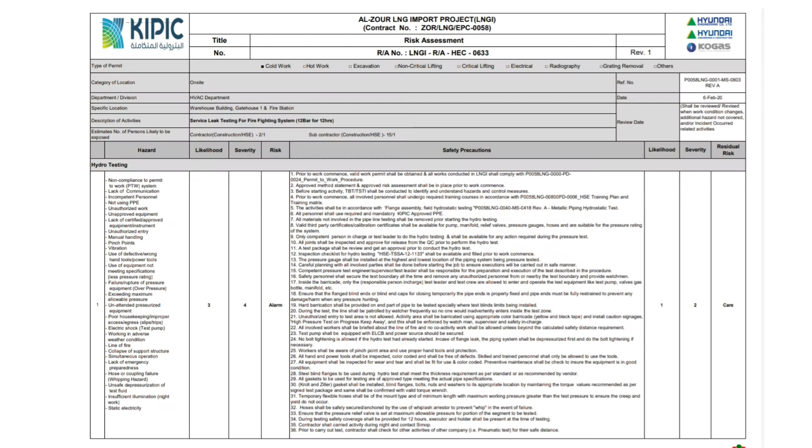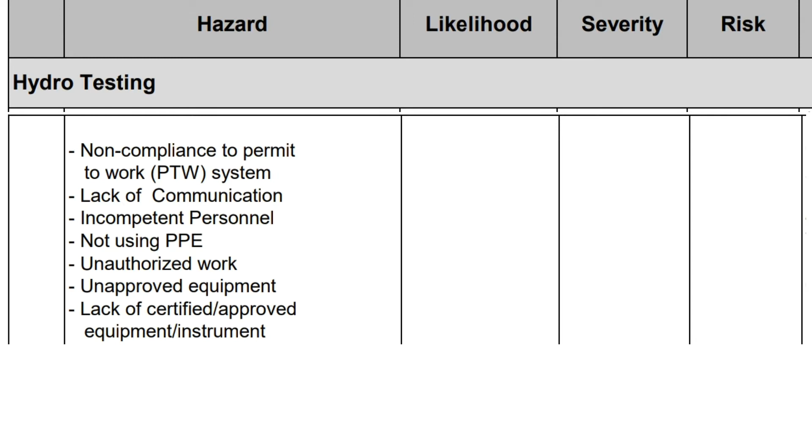Hazard: non-compliance to permit to work (PTW) system, lack of communication, incompetent personnel, not using PPE, unauthorized work, unapproved equipment, lack of certified or approved equipment and instruments, unauthorized entry.

Manual handling, pinch points, vibration, use of defective or wrong hand tools and power tools, use of equipment not meeting specifications, less pressure rating, failure, rupture of pressure equipment, overpressure, exceeding maximum allowable pressure.

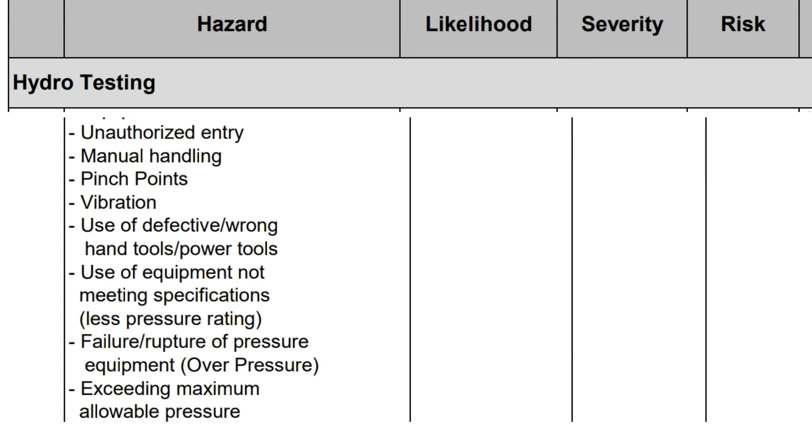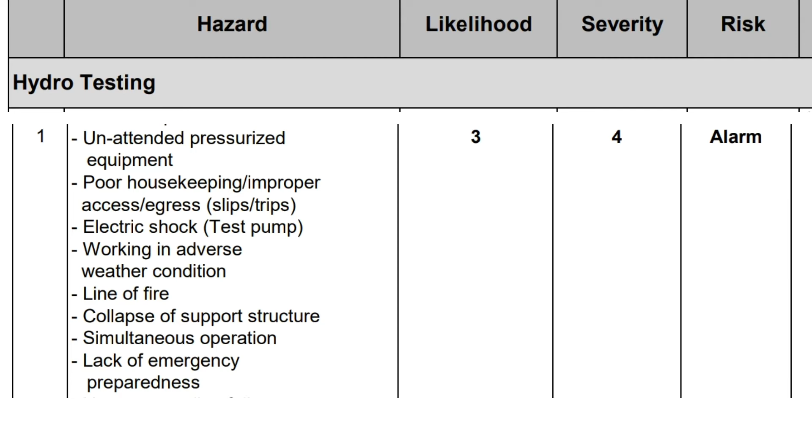Unattended pressurized equipment, poor housekeeping, improper access and egress, slips, trips, electric shock from test pump, working in adverse weather conditions, line of fire, collapse of support structure, simultaneous operation, lack of emergency preparedness, hose or coupling failure, whipping hazard.

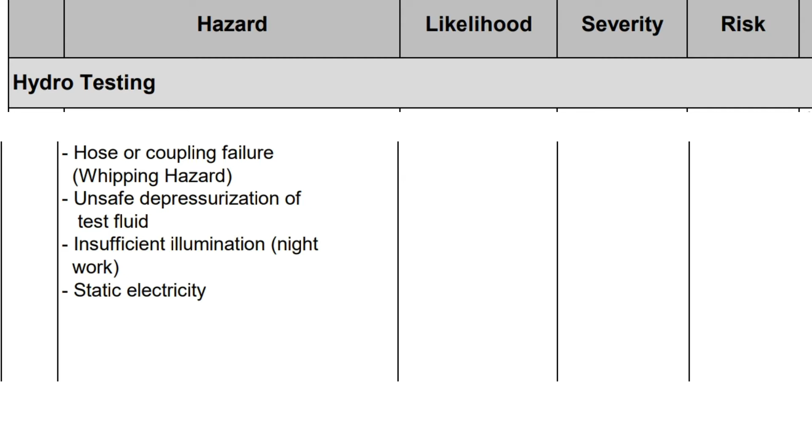1. Prior to work commence, a valid work permit shall be obtained and all works conducted in LNGI shall comply with the permit to work procedure.

2. Approved method statement and approved risk assessment shall be in place prior to work commence.

3. Before starting activity, TBT/TSTI shall be conducted to identify and understand hazards and control measures.

4. Prior to work commence, all involved personnel shall undergo required training courses in accordance with the HSE training plan and training matrix.

5. The activities shall be in accordance with flange assembly, field hydrostatic testing, and metallic piping hydrostatic test.

6. All personnel shall use required and mandatory KIPIC approved PPE.

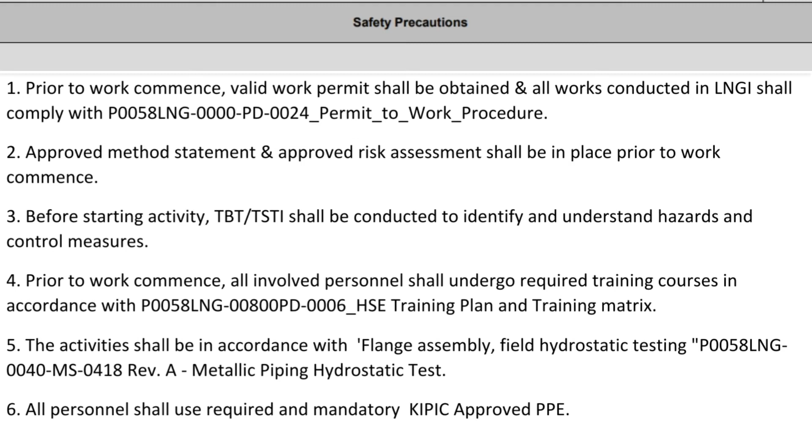7. All materials not involved in the pipeline testing shall be removed prior to starting the hydro testing.

8. Valid third-party and calibration certificates shall be available for pump, manifold, relief valves, pressure gauges, and hoses, and are suitable for the pressure rating of the system.

9. Only a competent person in charge or test leader shall do the hydro testing and shall be available for any action required during the pressure test.

10. All joints shall be inspected and approved for release from QC prior to performing the hydro test.

11. A test package shall be reviewed and get approval prior to conducting the hydro test.

12. An inspection checklist for hydro testing shall be available and filled prior to work commence.

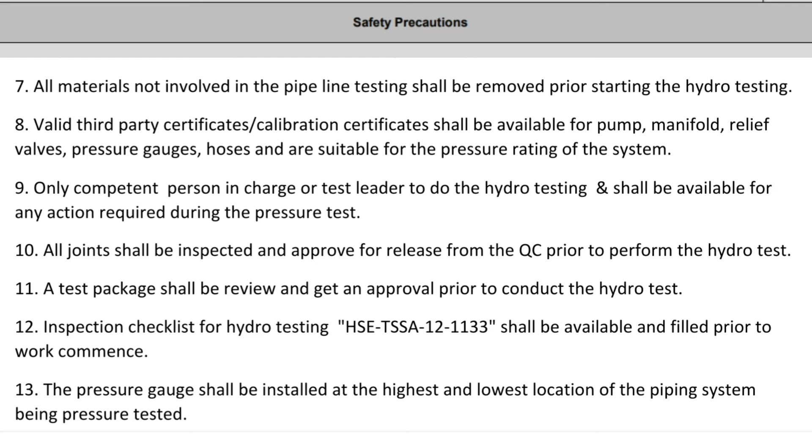13. The pressure gauge shall be installed at the highest and lowest location of the piping system being pressure tested.

14. Careful planning with all involved parties shall be done before starting the job to ensure execution is carried out in a safe manner.

15. A competent pressure test engineer, supervisor, or test leader shall be responsible for the preparation and execution of the test described in the procedure.

16. Safety personnel shall secure the test boundary at all times and remove any unauthorized personnel from or near the test boundary, and provide a watchman. 17. Inside the barricade, only...

...the responsible person in charge, test leader, and test crew are allowed to enter and operate the test equipment like test pump, valves, gas bottle, manifold, etc.

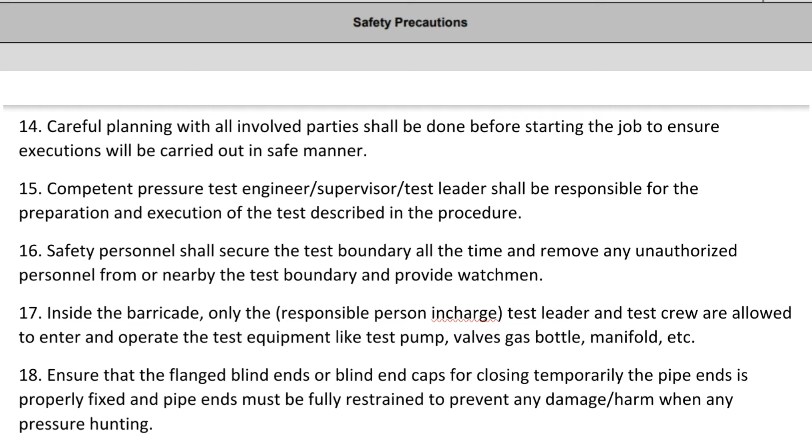18. Ensure that flanged blind ends or blind end caps for temporarily closing the pipe ends are properly fixed, and pipe ends must be fully restrained to prevent any damage or harm when pressure hunting.

19. Hard barrication shall be provided on the end part of the pipe to be tested, especially where test blind limits are installed. 20. During the test, the line shall be patrolled by a watcher frequently so no one would inadvertently enter inside the test zone.

21. Unauthorized entry to the test area is not allowed. The activity area shall be barricaded using appropriate colored barricade, yellow and black tape, and caution signage such as 'high pressure test in progress, keep away' shall be installed, and this shall be enforced by the watchman, supervisor, and safety in charge.

22. All involved workers shall be briefed about the line of fire, and no co-activity work shall be allowed unless beyond the calculated safety distance requirement.

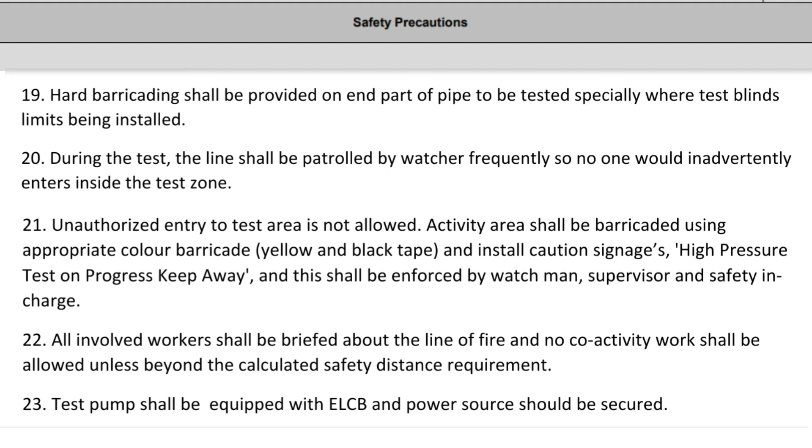23. Test pump shall be equipped with an ELCB and the power source should be secured.

24. No bolt tightening is allowed if the hydro test has already started. In case of a flange leak, the piping system shall be depressurized first and then bolt tightening done if necessary.

25. Workers shall be aware of pinch point areas and use proper hand tools and protection. 26. All hand and power tools shall be inspected, color-coded, and free of defects. Skilled and trained personnel shall only be allowed to use the tools.

27. All equipment shall be inspected for wear and tear, fit for use, and color-coded. Preventive maintenance shall be checked to ensure equipment is in good condition.

28. Steel blind flanges used during hydro test shall meet the thickness requirement as per standard or as recommended by vendor. 29. All gaskets used for testing shall be of approved type meeting the actual pipe specifications.

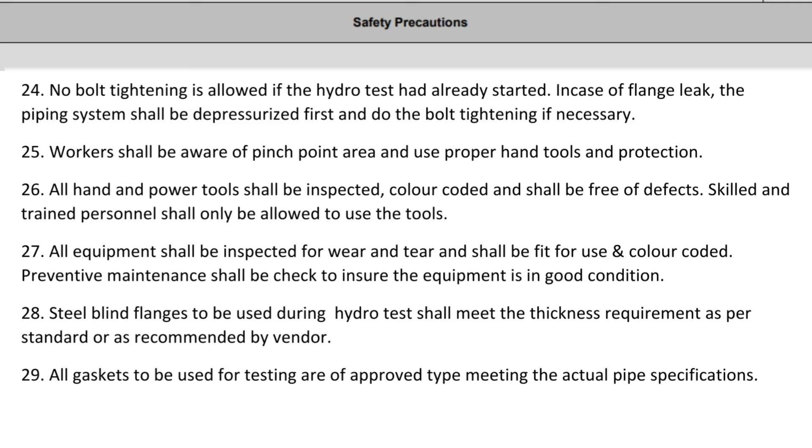30. The correct size gasket shall be installed, with blind flanges, bolts, nuts and washers placed in their appropriate location, maintaining the torque values recommended per the signed test package, confirmed with a valid torque wrench.

31. Temporary flexible hoses shall be of the approved type and minimum length, with maximum working pressure greater than the test pressure to ensure creep and yield do not occur.

32. Hoses shall be safely secured and anchored using whiplash arrestors to prevent whip in the event of failure. 33. Ensure the pressure relief valve is set at the maximum allowable pressure for the portion of the segment being tested. 34. During testing, safety coverage shall be provided for 12 hours, and the executor and holder shall be present at the time of testing.

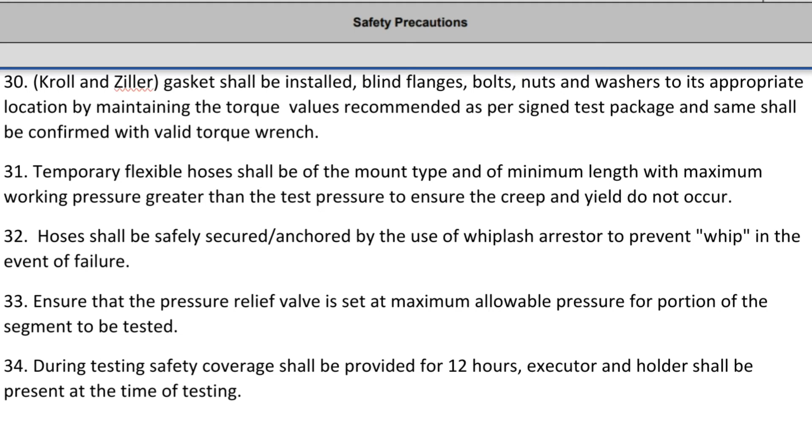37. Ensure proper communication between the worker in the manifold area and at the end point.

38. The pressure shall be raised gradually until reaching the test pressure and held as per the approved procedure and work method statement.

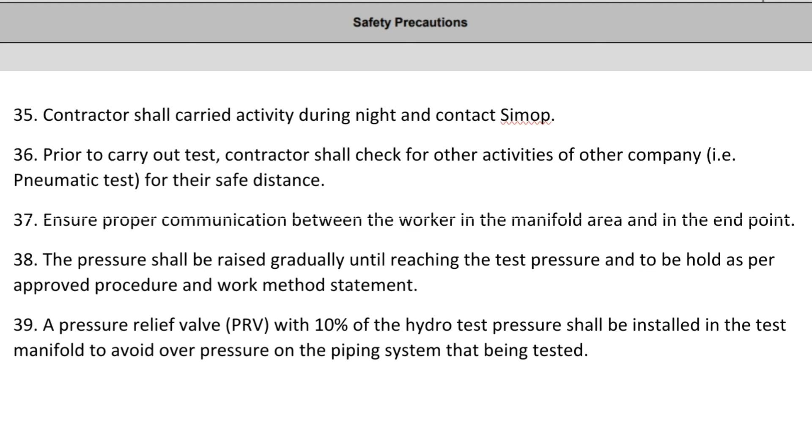39. A pressure relief valve (PRV) set at 10% of the hydro test pressure shall be installed in the test manifold to avoid overpressure on the piping system being tested.

40. The test manifold shall be located in an open and secured area, far from the line system. If necessary, minimize crew presence near the test manifold.

41. The sectional pipeline to be tested shall be partially backfilled, supported using sandbags, and joints shall remain exposed prior to pressure testing.

42. All pipe equipment supports shall be inspected as per project specifications. Care shall be taken to avoid overloading of the support system or supporting structures.

43. Proper housekeeping shall be maintained at all times, and all unnecessary materials shall be removed.

44. Provide proper storage for used or to-be-used hydro test materials with barricades and signage. 45. All Chicago couplings, fittings, safety pins, and rated hoses of the test pump shall be pre-inspected before use.

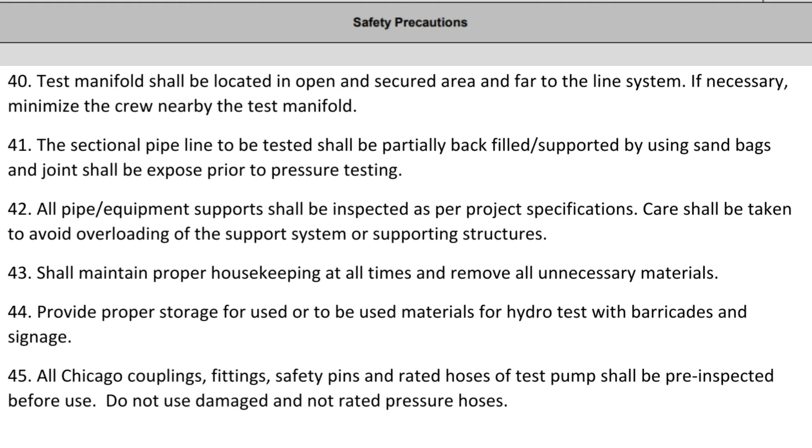Do not use damaged or unrated pressure hoses. 46. The test pump shall be grounded to avoid static electricity.

47. Ensure test pump hose connections have whiplash arresters on them to mitigate whip during hose failure. 48. Always position the test pump in a firm and stable place and at a safe distance from the working parts of a tool.

in case of abrupt changes in movement occur. 49. Ensure that cables and hoses are hung, routed, or laid so they will not cause obstruction or tripping.

50. Work-rest regime shall be complied with as per the heat stress index, abiding by the heat stress procedure. 51. All employees shall comply with the emergency management plan and notify the hotline in case of emergency.

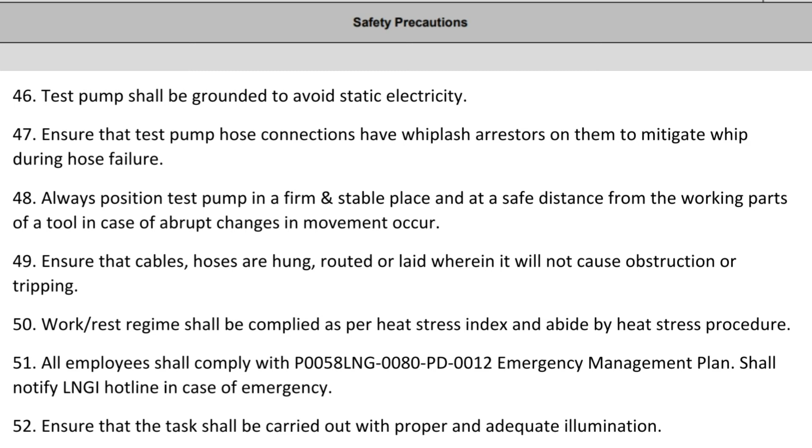52. Ensure the task is carried out with proper and adequate illumination. 53. Access to the building shall be restricted during testing, with no unauthorized entry.

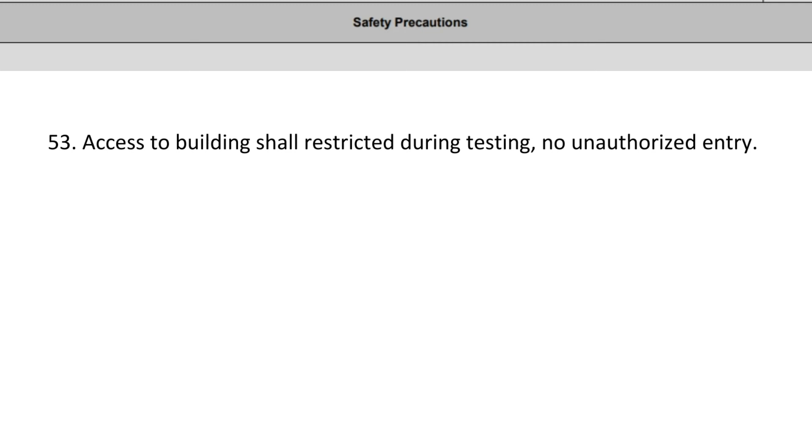Work at height. Scaffolding hazards include: fall of personnel, fall of material, dropped objects, collapse of scaffold, hole opening, slip, trip, fall, improper access and egress, and unauthorized modification of scaffold.

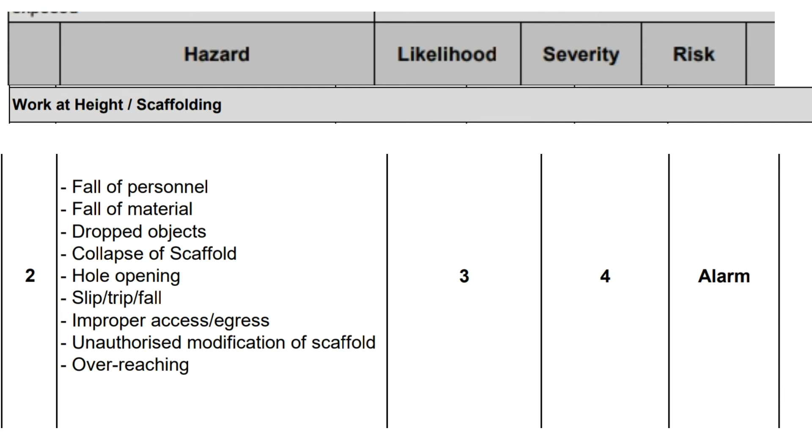Over-reaching. Safety precautions: 1. All personnel working on scaffold shall wear a full body harness with shock-absorbing double lanyard and maintain 100% tie-off at all times, strictly followed. The full body harness shall be inspected and color-coded.

Any defect found or acquired by these items shall result in removal from site and placement in the quarantine area.

2. Scaffold erection and dismantling works shall only be conducted by scaffolders under a competent supervisor, both with KIPIC-approved third-party certifications. 3. Ladders must be in good condition and must not be painted.

Ladders shall extend approximately 1 meter above the working platform and shall be secured so they cannot slip. 4. The user shall inspect the ladder before each use. A qualified person shall inspect ladders and attach an inspection sticker.

Color coding. 5. While ascending or descending a ladder...

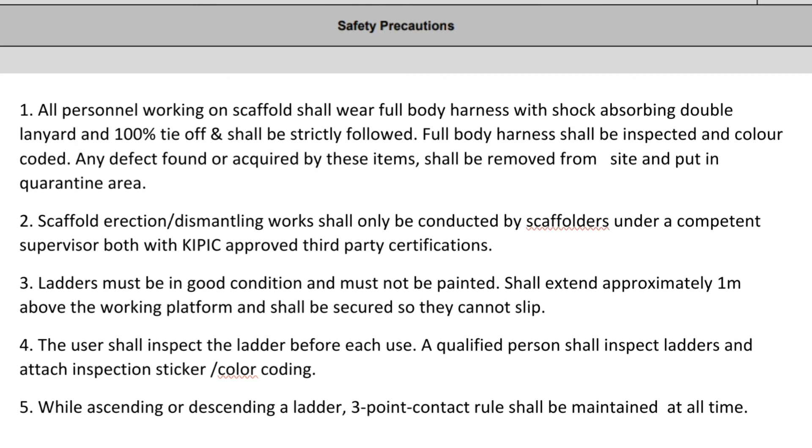Contact rule shall be maintained at all times. Guardrail protection such as top rails must be 38 to 45 inches above the platform surface. Mid rails shall be installed at a height approximately midway between the top rail and the platform surface. Toe boards shall be installed on work platforms.

Ensure that platforms are complete and there are no gaps or traps in boarded decks. Toolkit must be used while working at height. Hand tools must be tied to prevent falling from height.

Prior to removal or modification of safety facility, authorization shall be obtained. Refer to the approved procedure number.

For hole openings 600 mm or less, plywood with thickness of 12 mm shall be used. For 600 to 2000 mm, it shall be covered with metal scaffold planks. If more than 2000 mm, additional hard barricade shall be installed.

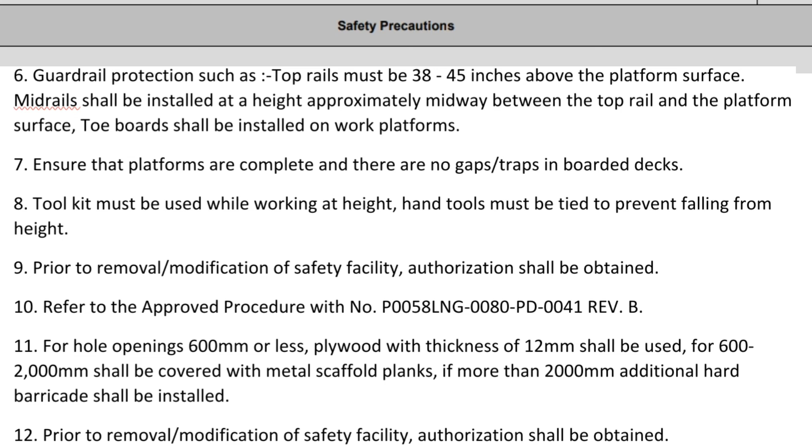Prior to removal or modification of safety facility, authorization shall be obtained. Hard barricade and caution signage shall be provided to prevent unauthorized entry.

Prior to removal or modification of floor opening cover, safety facility authorization shall be obtained. If floor cover is required to be removed for any work, the supervisor shall inform the HSE area in charge person.

Use mechanical assistance where possible for lifting or lowering materials. Do not carry materials up on ladders. Ensure that all access and egress are clear from obstructions.

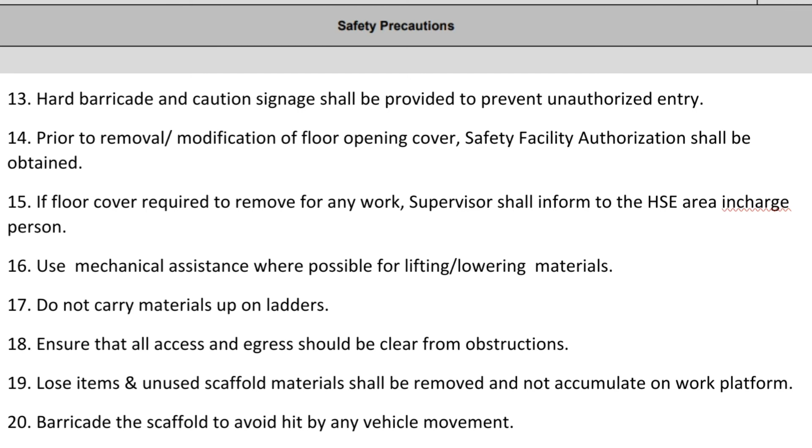Loose items and unused scaffold materials shall be removed and not accumulated on work platforms. Barricade the scaffold to avoid being hit by any vehicle movement.

Prohibition of overloading on scaffolding system. No materials to be off-loaded or stored on scaffolding.

Do not hook chain blocks on the scaffolds to lift any materials. Do not overload the scaffold.

Scaffolding inspection shall be done and filled by the scaffold supervisor, and an updated scaffold register maintained. Climbing to scaffold braces, runners, etc. is not allowed.

The scaffold inspector or supervisor shall use the HEC-approved scaffold tag system: green tag if the scaffold is safe to use, and red tag if not.

Scaffolding shall not be used, constructed, or erected in case of storm or high wind speed. Over-reaching shall not be allowed.

Working outside the guardrail is prohibited. If the job demands it, then another job-specific risk assessment shall be conducted.

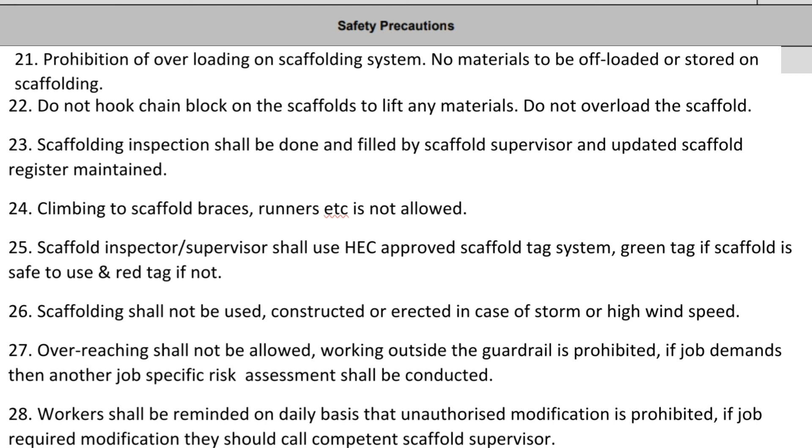Workers shall be reminded on a daily basis that unauthorized modification is prohibited. If job-required modification is needed, they should call the competent scaffold supervisor.

Movement of vehicles, transportation of hydro-testing equipment. Hazards include poor maneuvering of vehicles and heavy equipment, collision with other equipment or adjacent structures, personnel crushed or struck by equipment, and equipment falling into excavation.

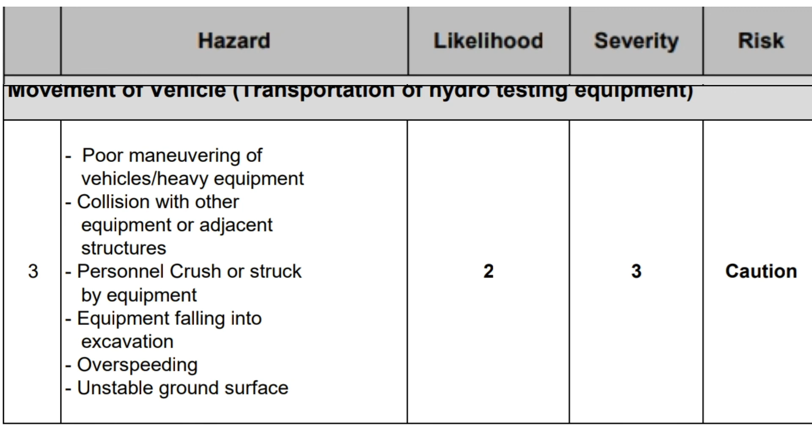Other hazards include overspeeding and unstable ground surface. Safety precautions follow.

A banksman or flagman shall be present for assisting the driver or operator of heavy equipment. The flagman shall wear a high visibility green vest with a red helmet and with flags or batons. All equipment operators and drivers shall have a valid Kuwait driving license and shall have undergone defensive driving training.

Ensure that excavations have hard barricade, signage, and blinking lights. Equipment being used shall be barricaded and shall ensure an exclusion zone with signage.

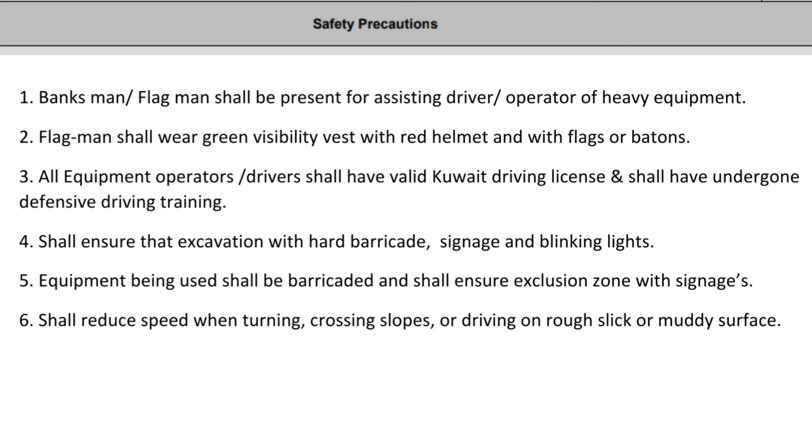Shall reduce speed when turning, crossing slopes, or driving on rough, slick, or muddy surfaces. Shall strictly follow site speed limits and traffic signs.

Flashing lights or strobes and audible alarm sound shall be operational on all moving vehicles inside the project site.

Park vehicles or equipment such that it does not impose disturbance to traffic or block access.

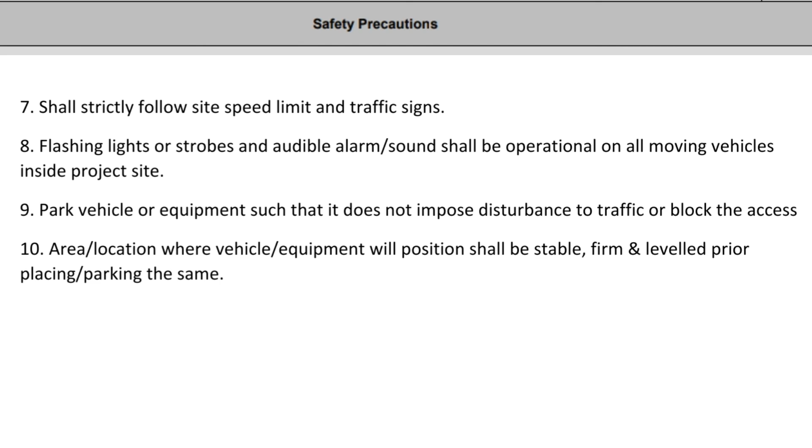The area or location where a vehicle or equipment will be positioned shall be stable, firm, and leveled prior to placing or parking the same.